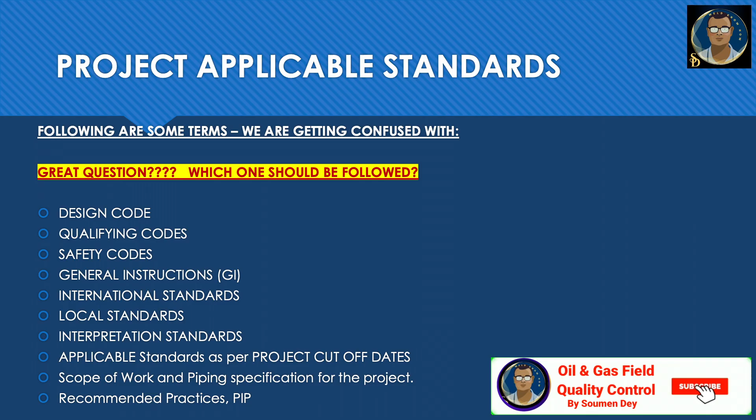Standards are a set of technical definitions and guidelines that function as instructions for designers and manufacturers. The users are responsible for the correct application of the same. Compliance with the standards does not itself confer immunity from legal obligations. So now, what are the codes?

Codes are laws or regulations that specify minimum standards to protect health and safety. A code is a group of general rules of systematic procedure for design, fabrication, installation, and inspection that are adopted by legal jurisdiction and made into law. Codes are intended to set forth engineering requirements deemed necessary for safe design and construction of piping installations.

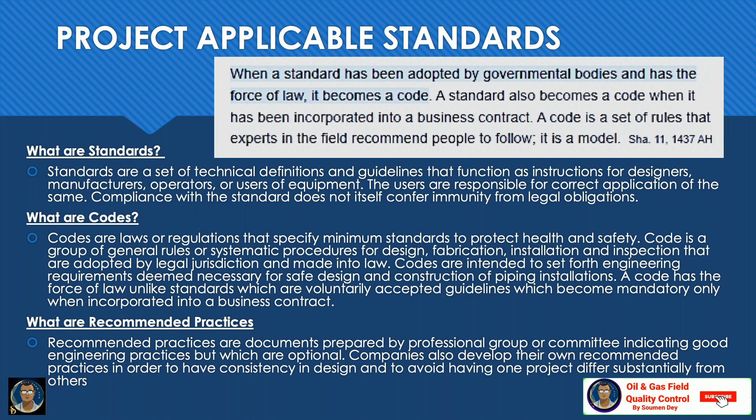A code has the force of law, unlike standards, which are voluntarily accepted guidelines that become mandatory only when incorporated into a business contract. So, what is the relation between codes and standards? When a standard has been adopted by government bodies and has the force of law, it becomes a code. A standard also becomes a code when it has been incorporated into a business contract.

A code is a set of rules that experts in the field recommend people to follow. It is a model. So a code is generally mandatory for the country we are working in, and standards can be international or local. We will follow those standards which are applicable for our project or scope of work.

What are recommended practices? Recommended practices are documents prepared by a professional group or committee indicating good engineering practices, but which are optional. Companies also develop their own recommended practices in order to have consistency in design and to avoid having one project differ substantially from others.

What is the purpose of codes and standards? Codes and standards establish minimum acceptable levels of safety, quality, and reliability. Understanding the codes and standards at both the industry and government levels will allow us to better understand the expectations of our chosen field. What are the objectives of using a standard?

To provide a minimum guideline to carry out piping fabrication and erection, to ensure that the work is carried out per project drawings and client project specifications, to avoid common deficiencies during installation, and to minimize rework during the construction phase. They economize the system, reduce inventory, and ensure readily available backups from the market. They help in the accumulation of knowledge.

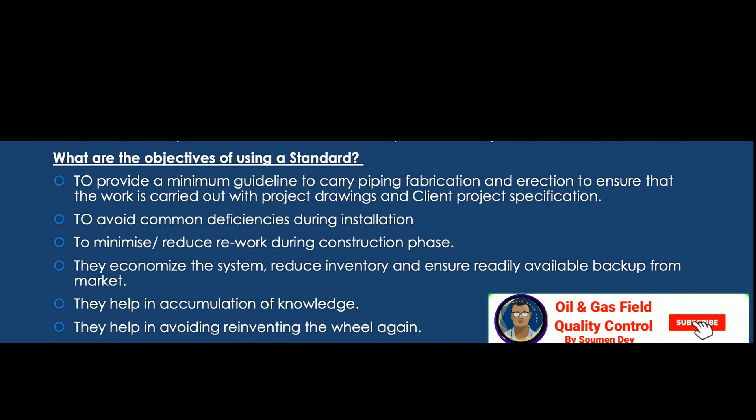Also, standards help us avoid reinventing the wheel. We will always take the gathered expert opinions and lessons learned, which are incorporated in a standard, to work with the easiest and shortcut method.

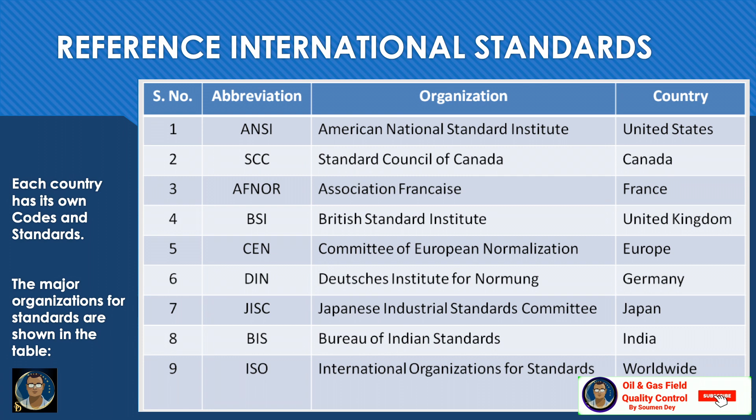Here are some examples of international standards and governing bodies. Each country has its own codes and standards. The major organizations in the world are shown in this table. ANSI is the American National Standards Institute, from the United States. For example, BSI is the British Standards Institution, United Kingdom, whereas BIS is the Bureau of Indian Standards, India's governing standards body. ISO is the International Organization for Standardization, worldwide.

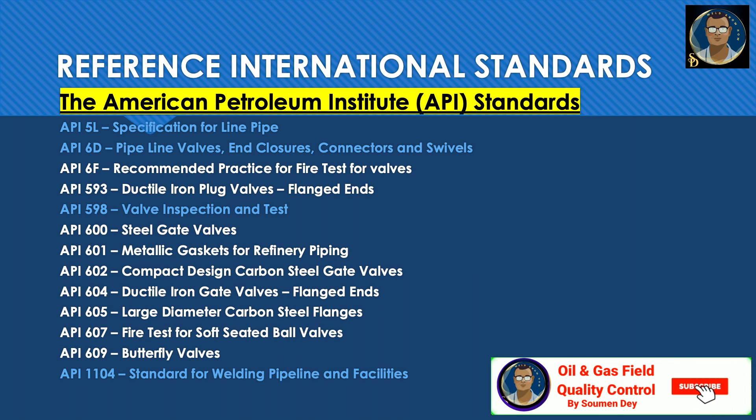The American Petroleum Institute, API standards. Some examples: API 5L is the specification for line pipe, extensively used all over the world to define or manufacture line pipes. API 6D is for pipeline valves. API 598 is valve inspection and testing. API 1104 is the standard for welding of pipelines and related facilities.

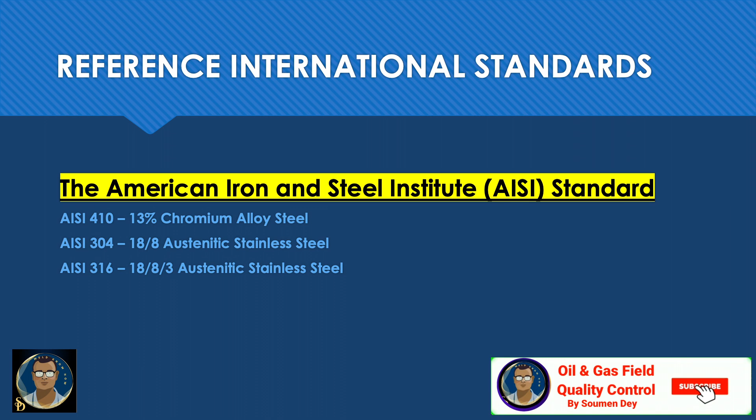This is AISI, which is the American Iron and Steel Institute. AISI 410 is a 13% chromium alloy steel. AISI 304 is an 18-8 austenitic stainless steel.

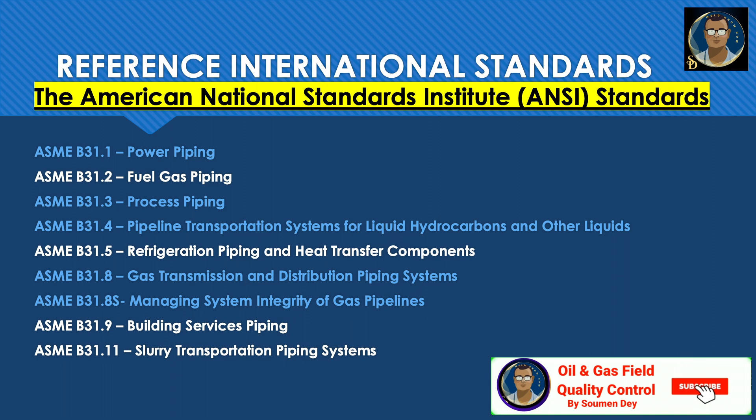Some of the major ANSI and ASME standards are listed here. You can stop the slide and go through them. I will mention some of the important ones we use. For example, ASME B16.5 is for steel pipe flanges and flange fittings, 16.20 for metallic gasket, 16.21 for non-metallic gasket and pipe flanges, and B16.47 is for large diameter steel flanges from NPS 26 inch to 60 inch.

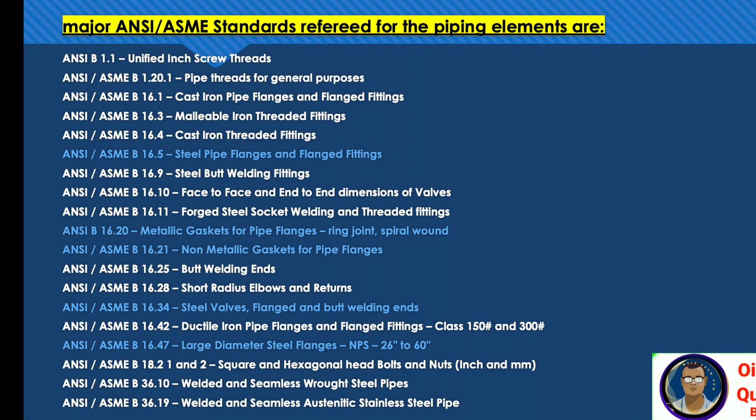American Society for Testing and Materials, ASTM, is used extensively for material testing in civil, mechanical and other fields. It consists of 16 sections on definitions and classifications of materials, construction and testing methods. Most ASTM standards are adopted by ASME and specified in ASME Section 2, which has 4 parts: Part A is ferrous material, Part B is non-ferrous, Part C is welding material, and Part D is for properties of materials.

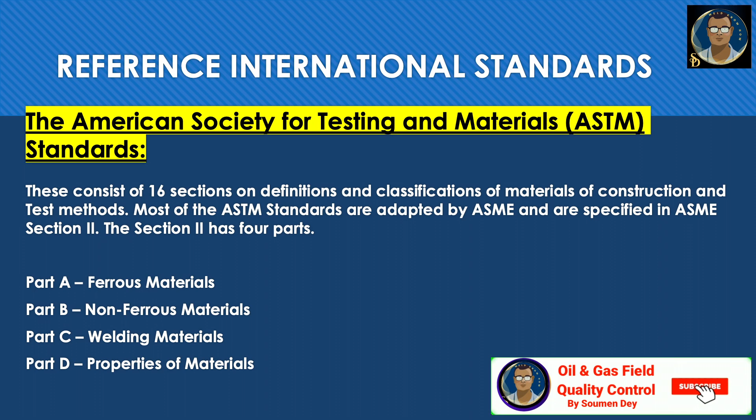American Welding Society, or AWS, provides information on welding fundamentals, weld design, welders training, testing and inspection of welds, and guidance on the application and use of welds. Individual electrode manufacturers give their own brand names for various electrodes, and these are sold under these names.

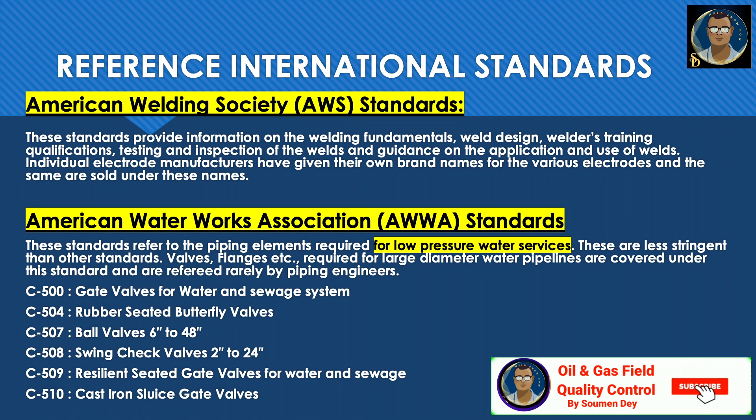American Water Works Association, AWWA, for your information, is used for low pressure water services and naturally is less stringent than other standards. The manufacturer's...

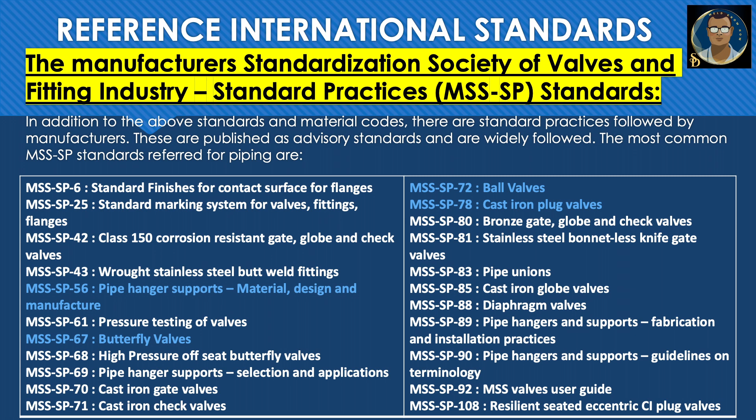Standardization Society for Valves and Fittings Industry uses standard practices, abbreviated as MSS SP standards. These are recommended standard practices followed by manufacturers, published as advisory standards and widely followed all over the world. The most common MSS SP standards referred for piping are listed in this table below. MSS SP 56, for example, is for pipe hanger supports, SP 67 for butterfly valves, SP 72 for ball valves, and so on.

Here are some British standards. In many instances, it is possible to find a British standard which may substitute for American standards. For example, BS 2080 is the British standard for face-to-face or end-to-end dimensions of valves, and is identical to ANSI or ASME B16.10.

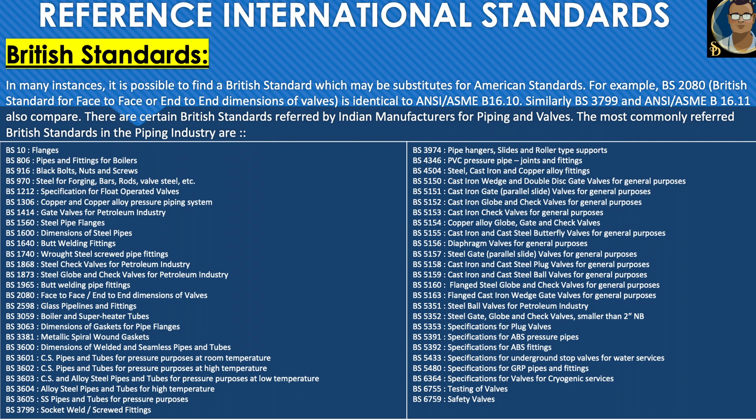There are certain British standards referred to by Indian manufacturers for piping and valves. The most commonly referred British standards in the piping industry are listed in the table. If you need to see, you can stop the slide and go through.

Here is a list of Indian standards. Something I want to mention is that Indian standards have not so far developed any standard for design of piping systems. Hence ANSI standards ASME B31.1 and 31.3 are widely used for design. These standards also accept materials covered in other standards. Unlike American standards, Indian standards cover dimensions and material specifications under the same standard number, and there are no groups based on the branch of engineering. Some of the most commonly referred Indian standards are listed here.

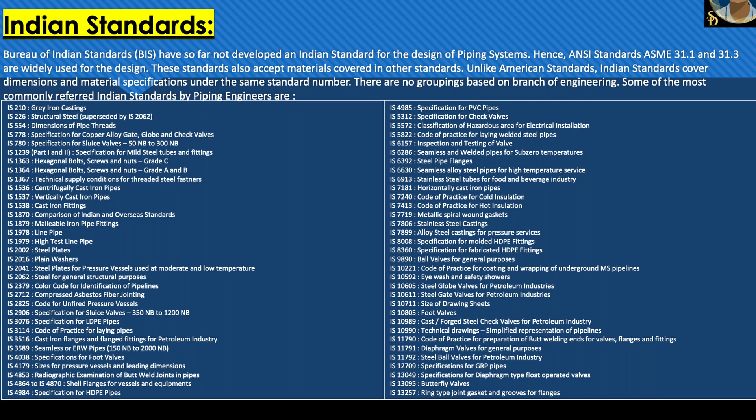Design code is selected based on project work scope and client requirement. We will take one example from one of my projects. Here our design code is ASME B31.8, which is for gas transmission pipelines. Construction code is API 1104, because B31.8 refers to API 1104 for this purpose. Construction code from our client is SAES-L-450 for pipeline and L350 for the piping portion.

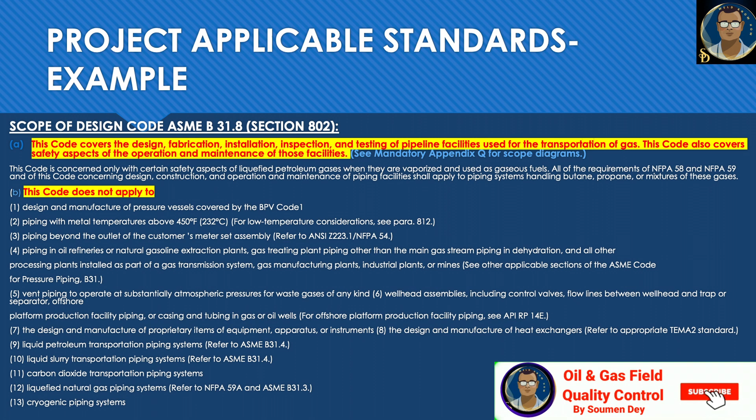Whenever we read a code or standard, we should go through the scope of the work. Some of the scope I have noted as a sample for our project. Our design code scope covers the design, fabrication, installation, inspection and testing of pipeline facilities used for transportation of gas. The code also covers safety aspects of the operation and maintenance of those facilities. The code even mentions very clearly what it does not apply to. You can go through by stopping the slide.

Here is the scope of construction code API 1104, 22nd edition, July 2021. This standard covers the gas and arc welding of butt weld and fillet weld joints in carbon and low alloy steel pipe and piping components used in the compression, pumping and transmission of crude petroleum products, fuel gases, carbon dioxide, nitrogen, and where applicable covers welding of distribution systems also, and so on. Reading the scope of work is very important.

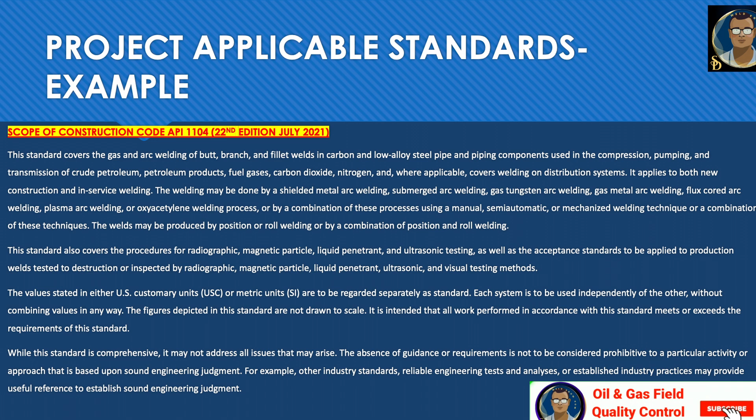So this design code and construction code are mandatory parts which we should follow in combination, along with the client or company standards. We took the work from them, so we need to follow the local standards and company standards also. Here is the scope of the construction code from the client. This standard supplements ASME B31.4 and B31.8 transportation piping codes and defines additional construction requirements for governing onshore pipelines. That means all requirements for 31.4 or 31.8, which are design codes, need to be followed, and additionally we need to follow the restrictions mentioned in the client standard.

Scope of the construction code for piping: this also supplements ASME B31 codes and defines additional requirements governing the fabrication and installation of metallic plant piping systems.

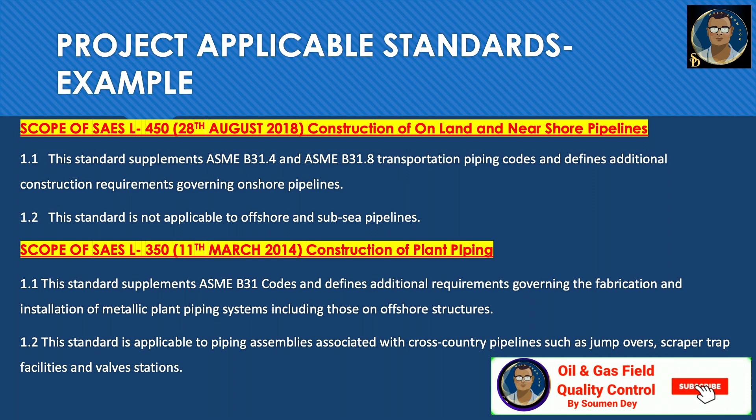The scope of any standards and code will tell you exactly what it is about, what is included in the standards or code, and what is excluded. This is very important when selecting any applicable codes and standards for the project.

Applicable code based on the project cutoff date is also very important. The latest standard should not always be followed. We should follow the project cutoff date standard, because the latest standard might have additional requirements which are not cost effective, and no contractor will ever accept that.

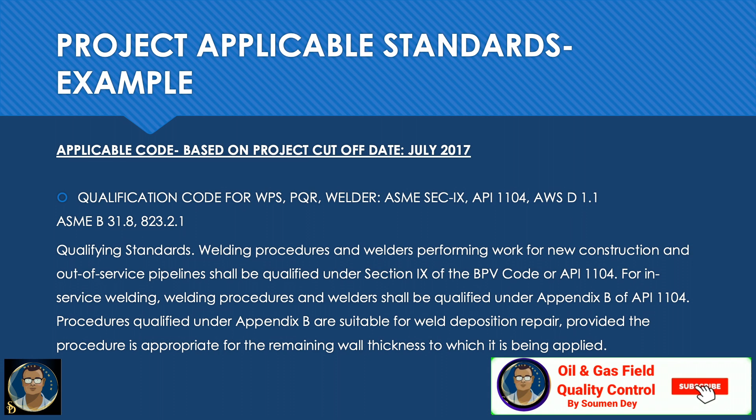Qualification code for WPS, PQR and welder can be ASME Section 9, API 1104, or AWS D1.1 for structural work. The welding procedure and welder performing the work, for new construction or out-of-service pipeline, shall be qualified under Section 9 or API 1104. For in-service welding, we need to follow API 1104. Procedure qualified welders per Appendix B are also suitable for weld deposition repair, provided the procedure is appropriate for the remaining wall thickness to which it is applied.

This paragraph is from the design code of our project, referring to API 1104 or Section 9 wherever suitable. This reference is important to understand why we are following API 1104 or Section 9. The design code is the first mandatory thing, and it will refer to other codes and standards. Your scope of work will also define which codes and standards you must follow - those are all applicable project standards.

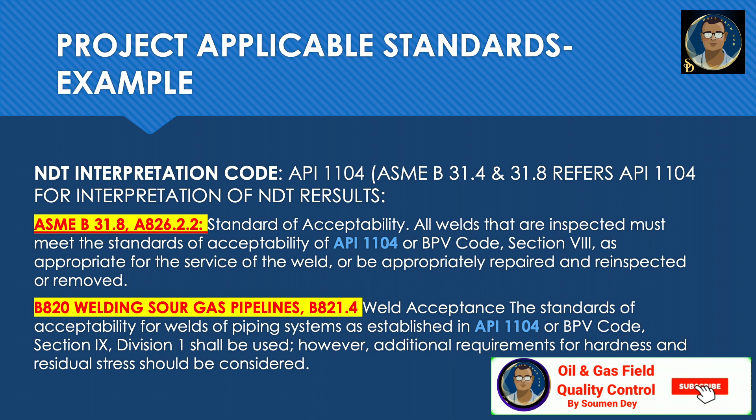NDT interpretation code is API 1104 for both non-sour and sour service. You can read this paragraph - they are referring to API 1104 for interpreting the NDT results.

So I am taking an example of our project. NDT interpretation for piping is B31.3 if it is process piping. If it is a pipeline, it will again follow API 1104 requirements for interpreting the NDT results.

WPS qualification code can be API 1104 or ASME Section 9. ASME Section 9 is widely adopted because of its flexibility, while API 1104 is kind of restricted with many groupings. The latest edition of API 1104 gives a lot more relaxation compared to the older editions.

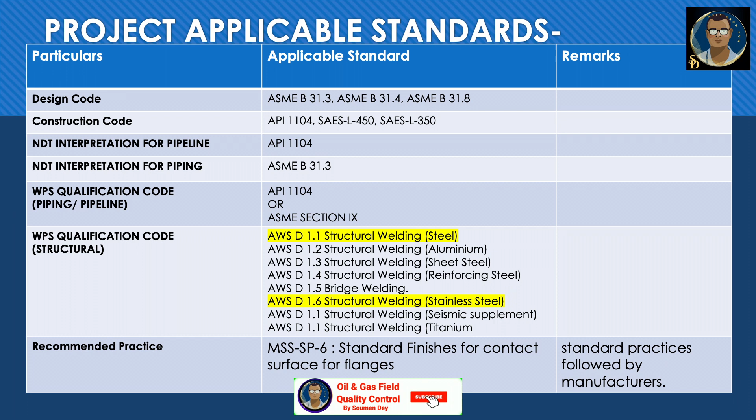Recommended practice, for example MSS SP6, covers standard finishes for contact surfaces of flanges. Process Industry Practices is an organization where all experts are members, and they are always developing engineering practices and procedures. If we are a member of this PIP, we can directly tap into these practices to execute our capital project consistently and cost effectively. This saves time and effort for us, because the practices they make are already proven and contributed by experts of this industry.

Standard drawings are provided by the client. I've put some examples in the table - for example, the first drawing is for branch connection, and there are many types of branch connections readily available there. If our IFC drawing mentions a type of branch connection, you can readily accept the dimensions and instructions from the standard drawing, with no need for special approval.

Codes also include local country codes and safety rules. For example, handling radiography isotopes always requires following the country's rules.

Scope of work is the project scope of work - it will define some special restrictions or give you relaxation for a specific project. General instructions are basically issued for safety - they will give you pressure testing safety requirements, certification of cable splicers, and many other issues, but these must mandatorily be followed if you are working in a specific country. Company and client codes and standards are also mandatory to follow, along with all the restrictions apart from the international standards and design codes.